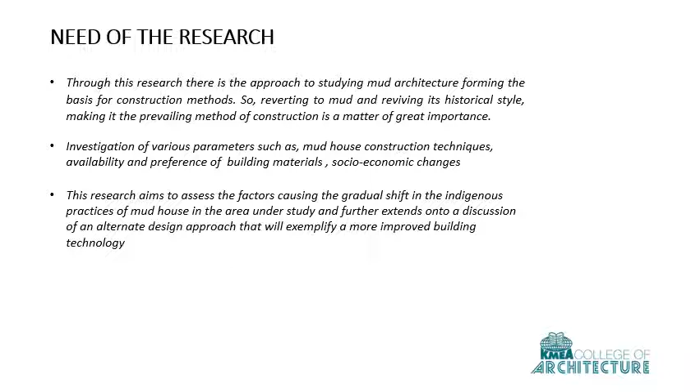Through this research, there is an approach to studying mud architecture, forming the basis for construction methods. So reverting to mud and reviving its historical style, making it the prevailing method of construction, is a matter of great importance. What sort of alteration is required to make mud equally or more compatible with other construction materials? How to find out the problems associated with mud construction and whether it can be used to help meet the requirements of present day construction. So these are the factors that have to be found out in this research.

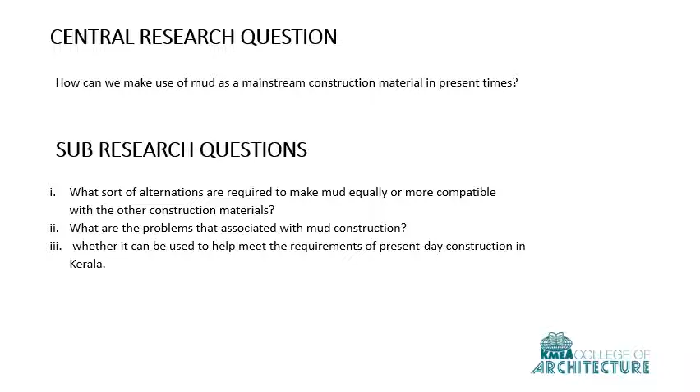The aim is to investigate the reasons behind the decline of the popularity of mud houses in Kerala. For that, we have to understand its use, advantages, and properties of construction, and also evaluate its acceptability as a building construction material. For that, we have to conduct interviews, surveys, post occupation surveys, and cost comparisons, etc., for finding out the reasons behind the decline of mud.

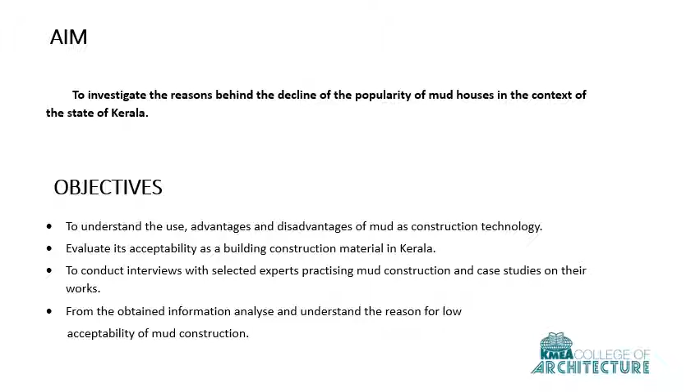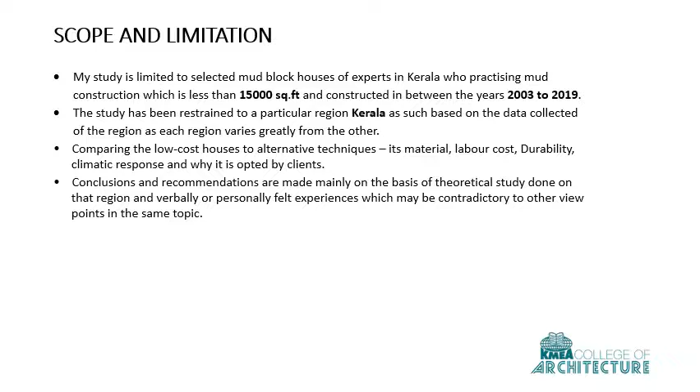My study is limited to selected mud block houses of experts in Kerala who practice mud construction, with less than 15,000 square feet, constructed between the years 2003 to 2019, and obviously belonging to the context of Kerala. Mud can be divided into three categories: mud for masonry walls, mud as a mortar, and mud stabilization.

Mud can be used either in the form of building blocks or applied directly into the walls. So the prevailing common techniques are rammed earth technique, cob technique, wattle and daub, adobe, and the new innovative techniques are compressed earth blocks and SMB. Rammed earth technique is the cheapest way to build buildings. It is merely considered a suitable construction technique, which uses only whatever is available at the site. But the labor cost is a bit higher compared to other techniques.

According to a study conducted based on the compressive strength of cement stabilized rammed earth walls, it shows that laterite soil stabilized with 6% cement can be used as a wall material for single-story houses in tropical climate.

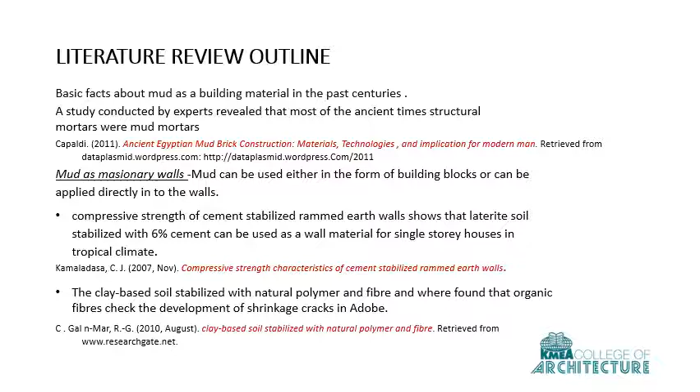The selection of construction technique depends mainly upon different factors, such as the availability of suitable mud for each method, availability of skilled labor, transportation facilities, and climatic conditions. Rammed earth walls give priority to strength rather than cob walls, which are mainly used for aesthetic purposes rather than functionality. Wattle and daub construction is mainly used in earthquake-prone areas. So by applying suitable soil and proper method of stabilization, it is possible to construct two-story buildings with rammed earth technique, and two or more stories with compressed earth blocks.

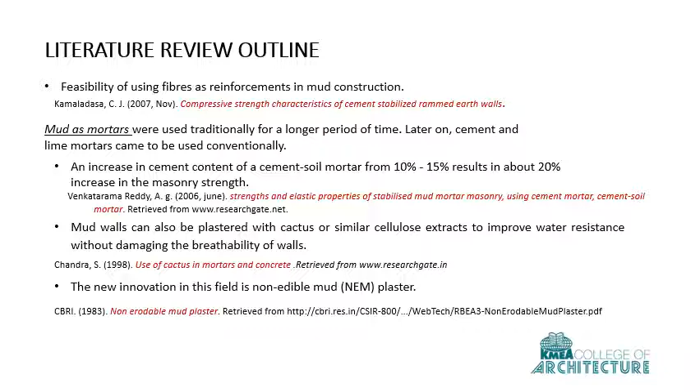Fiber reinforcement in rammed construction is suitable for improving durability and strength. There have been lots of studies conducted on the feasibility of using fibers as reinforcements in mud construction. Some have investigated the feasibility of fiber reinforced mud brick as a building material and found that fibers distributed randomly possess more strength than those placed in both directions.

Mortars were used traditionally for a longer period of time. Later on, cement and lime mortars came to be used conventionally. While lime mortars gave a better finish to the walls, cement mortars gave greater strength and durability. Some experts also investigated the compressive strengths and elastic properties of stabilized mud mortar, comparing cement mortar, cement soil mortar, and cement lime mortar, and concluded that an increase in cement content of cement soil mortar from 10 to 15% can result in an increase of 20% in its strength.

Compared to other conventional plasters, mud possesses a special property of breathability, which is an important aspect in any wall system. If the resistance to water penetration and termite attack is properly ensured, then mud is the most suitable material for healthy living.

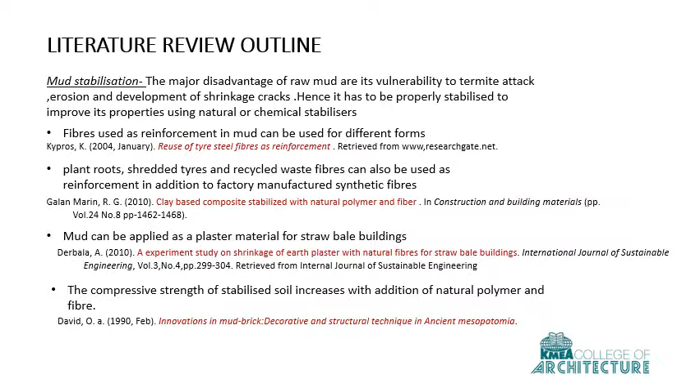Some experts made a study on the use of cactus extract in mortars and concrete. They found that cactus extract increases the plasticity of the mortar and improves water resistance and frost salt resistance. Plastering the concrete with this extract has also shown improved water resistance. Mud wall can also be plastered with cactus or similar cellulose extracts to improve water resistance without damaging the breathability of the walls. So this is a major solution for controlling water penetration and termite attack.

Another new innovation in this field is non-erodable mud, that is NEM plaster. CBRI Roorkee conducted experiments on the effectiveness of NEM plaster, and they said that it consists of 40 to 45% sand, 20 to 25% clay, and the remaining silt or loam, to which they added wheat straw, bitumen, and 10.5 liters of kerosene oil for every cubic meter of dry soil. The bitumen presence makes the mortar flexible.

This is effective in checking termite attack. The plastered wall will have a black dot appearance due to the bitumen. Plastering can also be done with activated carbon, cow dung, and fenugreek seeds, which are easily available locally.

Mud walls constructed using rammed techniques give a rough texture on removing the formwork. Later, smooth plastering was done to ensure smoothness.

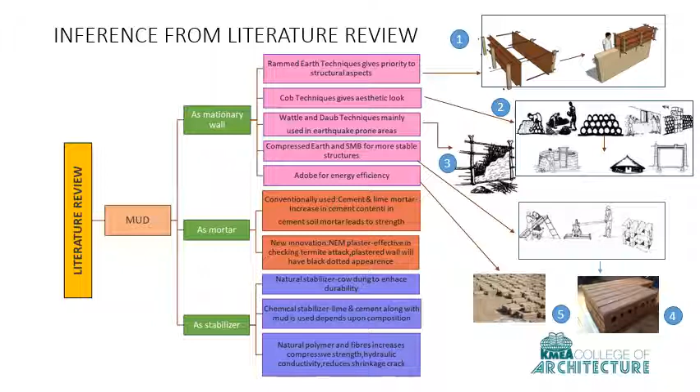According to literature review, mud is a versatile, compatible and sustainable material for construction. Yet there is a scope for detailed scientific study on mud as a construction material. We have to find out the comfort level, and what aspects are taken by the great experts to bring back the old tradition.

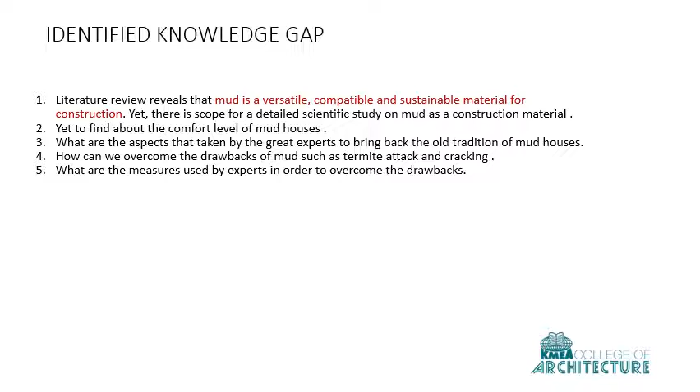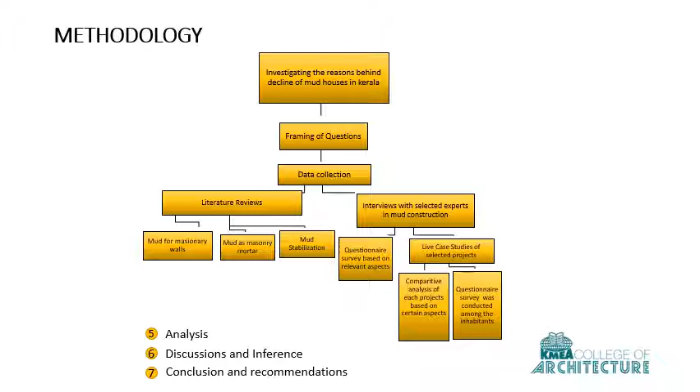So what are the measures used by experts to overcome termite attack and cracking? After the literature review, interviews were conducted with selected experts practicing mud, mainly G. Shankar, P.K. Sreenivasan, P. Aravind, and Eugene Pandala. A questionnaire survey was conducted, followed by case studies of their projects, then analysis documenting other aspects such as materials, techniques, and maintenance.

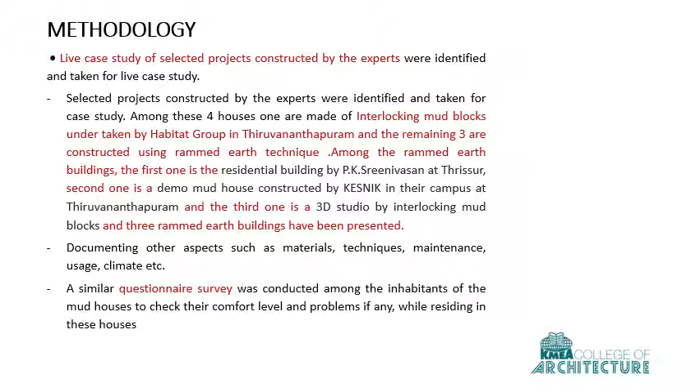A similar questionnaire survey was conducted among inhabitants of the mud houses to check their comfort level and problems, if any, while residing in these houses. After the comparative analysis, the estimation of low-cost mud houses with appropriate conventional houses has been done to understand the cost comparison between these two houses.

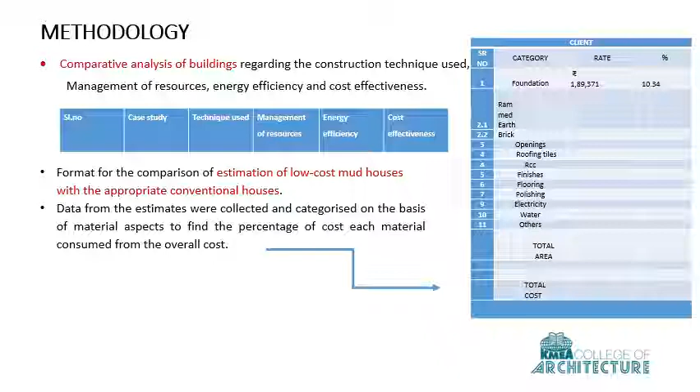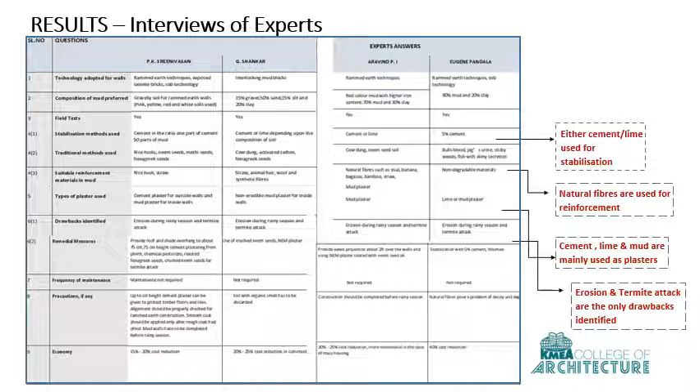Even though the four experts are from different fields, they do have common methods, like they either use cement or lime for stabilization, they used natural fibers for reinforcement, and cement, lime and mud for plastering. They all said that the major drawback for mud houses is erosion and termite attack. We already found a solution for controlling them in the literature review part. The mud, when properly stabilized and reinforced, can overcome its drawbacks and function as an excellent building material. More economy can be achieved from that.

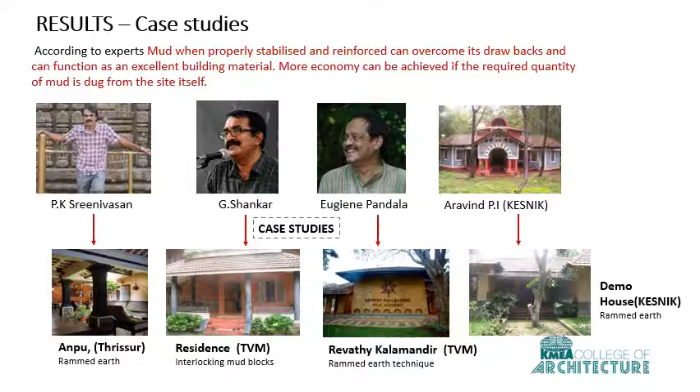So then let's move on to the case studies. For these, the cost was reduced to a much extent, and the stabilization was done with cement, reinforcement was done with fiber. Outer walls were left unplastered, the inner walls were plastered with mud plaster, and one used interlock bricks, the other used rammed techniques.

The walls are left unplastered. They used much effort to control the cost. Stabilization was done with 5% cement to check water penetration, and a lot of ventilation and jaali works are given for proper air circulation.

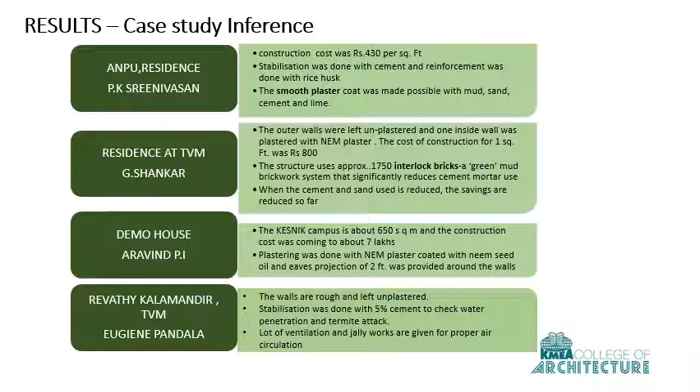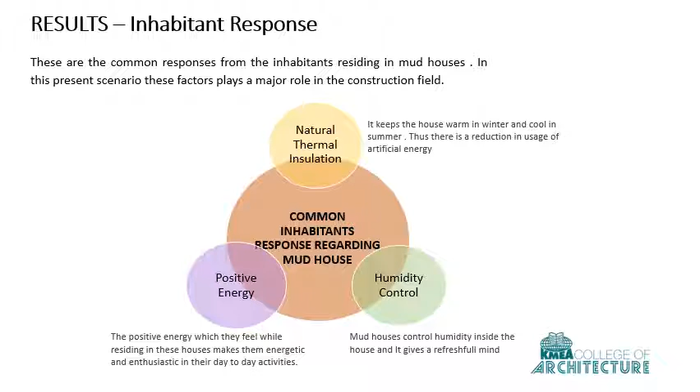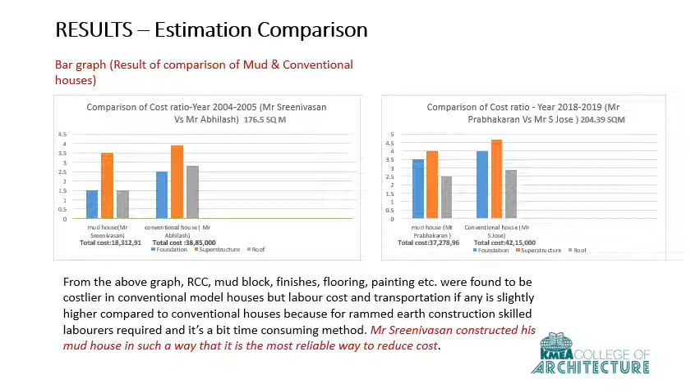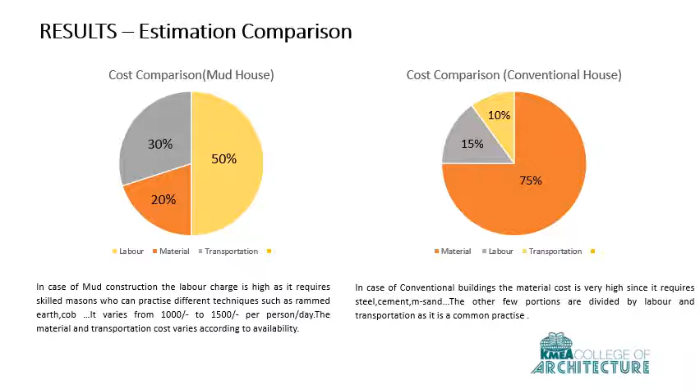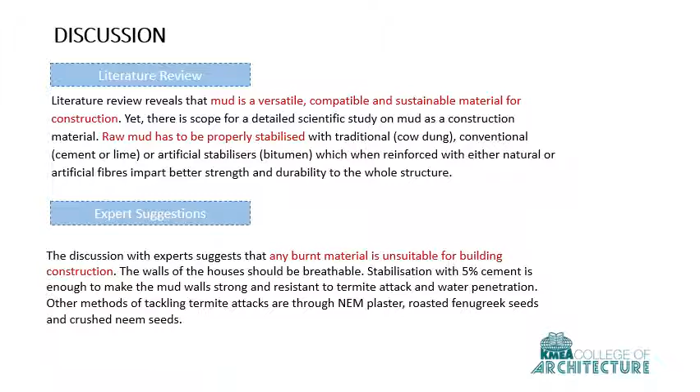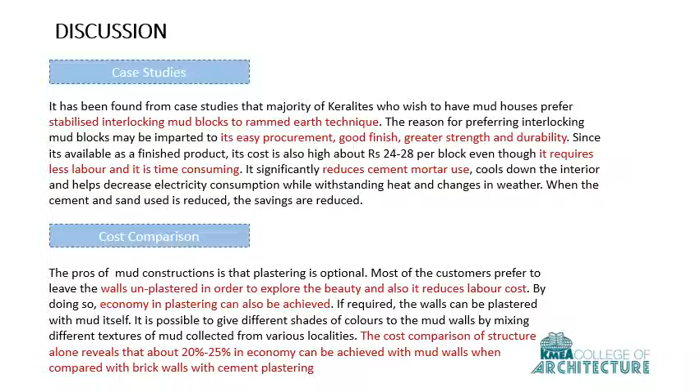In case studies, Keralites prefer stabilized interlocking mud blocks over the rammed technique because of easier procurement, good finish, greater strength and durability. Even though it is costly, it requires less cement and sand and also helps decrease energy consumption. In cost comparison, most customers prefer to leave walls unplastered to explore the beauty and reduce labor cost. It also reveals that 20 to 25% economy can be achieved with mud walls compared to brick walls with cement plastering.

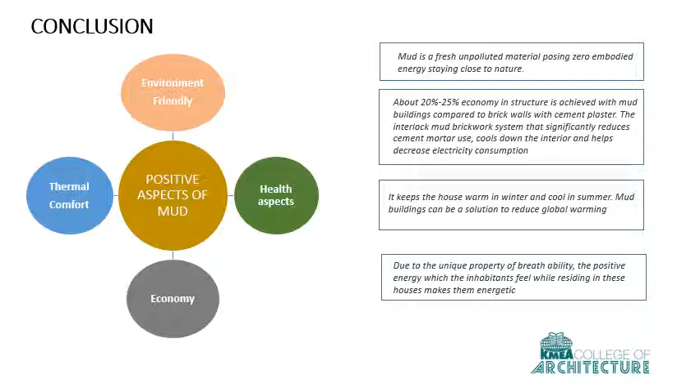So it is concluded that there are some positive aspects of mud: it is environment friendly, provides thermal comfort, is good for health, and is economical. Mud is a fresh, unpolluted material possessing zero embodied energy. 20 to 25% economy in structure can be achieved with mud buildings. It keeps the house warm in winter and cool in summer. Due to the unique property of breathability, positive energy is felt by inhabitants residing in mud houses.

Social factors and technological factors led to a decline of mud houses in Kerala. Hence, measures have to be taken to overcome the situation. Based on the nature of the soil and client's choice, a suitable technology may be adopted for the mud building. The soil should be selected after conducting proper field tests. Depending on the soil composition, proper stabilization has to be done. The construction of mud buildings has to be carefully planned to avoid too wet or too dry climate conditions.

Construction using interlocking mud blocks presents a neat finish. For other technologies, smooth plastering with mud can be done. At least one skilled mason should be there to supervise the entire work. While erecting the rammed formwork, care should be taken to keep the alignment vertical.

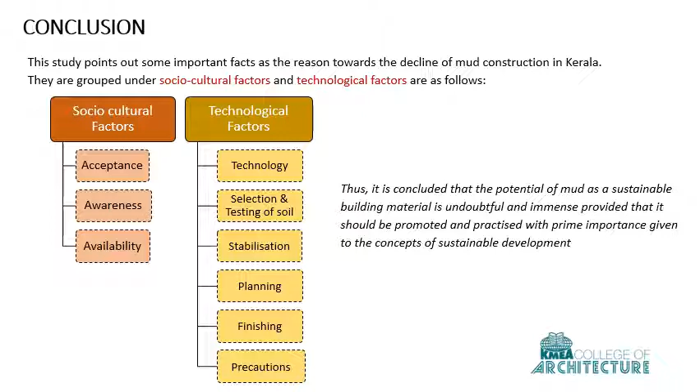Thus, it is concluded that the potential of mud as a sustainable building material is undoubtful and immense, provided that it should be promoted and practiced with prime importance given to the concept of sustainable development. Thank you.